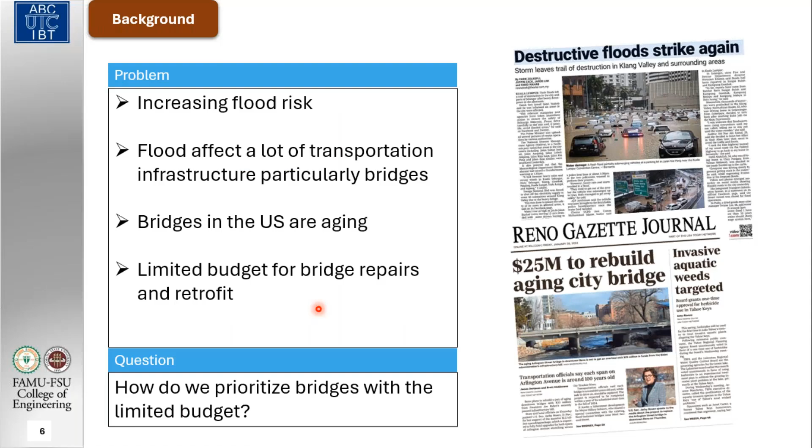Across the world, and even in the United States here, we are seeing increasing reports of destructive flood events. These floods are not just environmental issues, they directly impact transportation systems, especially bridges. To add to that, bridges in the United States are aging. This points to the fact that there's a need for maintaining bridges across the country. However, to construct or to repair a bridge is very expensive, and especially with a limited budget for bridge repair, this becomes a challenge. So the question we ask ourselves is, how do we prioritize bridges with the limited funds or budget we have?

So to do that, we did some literature review on this topic, and we were able to group it into four main themes. Each theme contributes important insights, but also reveals a key gap that motivates this research. The first theme we focus on is bridge structural health assessments. Studies such as Ntotsios et al. have explored advanced methods for detecting bridge damages.

Other research in this theme also talks about the nonlinear bridge health index. For instance, Jiang and Rens' research, as well as Inkoom et al., examine how both linear and nonlinear approaches of computing bridge health index affect the sufficiency rating used by the Federal Highway Administration. However, these studies primarily focus on the physical condition of the bridges, with limited consideration of how the conditions affect the broader transportation network.

The second theme we examined was the impact of infrastructure on accessibility and interdependencies. Pioneer researchers like Rinaldi et al. introduced the concept of cascading failure in interconnected systems. Similarly, Sharma et al. also provided a unified framework for modeling infrastructure interdependencies. Also, Mostafavi provided an extended resilience framework, incorporating stakeholder decision-making and resource allocation. Despite these contributions, most of the work remained conceptual with limited integration of detailed asset-level bridge conditions.

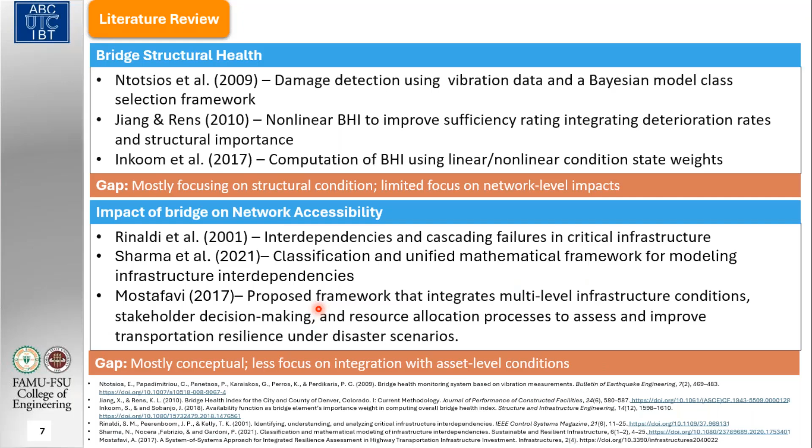The third theme we considered was the socioeconomic impact of bridges. Studies such as Donovan and Brooks highlight the role of bridges in supporting rural economies. Gandy et al. also showed that disadvantaged communities are disproportionately affected by bridge deterioration. Martens also emphasized that accessibility rather than mobility should be the central aim in transportation planning. This research also had a limitation in linking the bridge conditions and disruptions to population-level impact and accessibility outcomes. Finally, the last theme we considered was bridge prioritization.

Recent research from Sobanjo and Thompson emphasized the importance of incorporating risks and vulnerability into the prioritization framework. Earlier work by Gokey also integrates structural economics and policy consideration. Whilst this research was really good, and we also adopted some in our research, most of them were engineering focused with limited incorporation of spatial accessibility and how it affects the society.

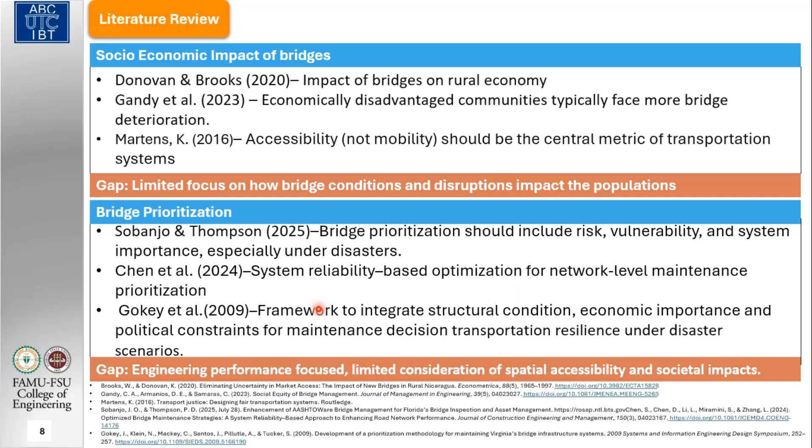Overall, the literature shows a strong advancement in individual areas. However, there's a clear gap in integrating these dimensions into a unified data-driven framework. So this led to our research aim, which was to develop a comprehensive data-driven bridge prioritization framework that supports optimal decision-making under constrained funding conditions.

Duval County was selected as a study area because it provides an ideal environment to demonstrate the scalability of this proposed framework. Duval County includes a mix of urban, suburban, and rural areas. Duval County also has a large complex transportation network and a diverse population distribution, meaning the model, when tested here, will provide a realistic and heterogeneous condition to scale it to other parts of the state.

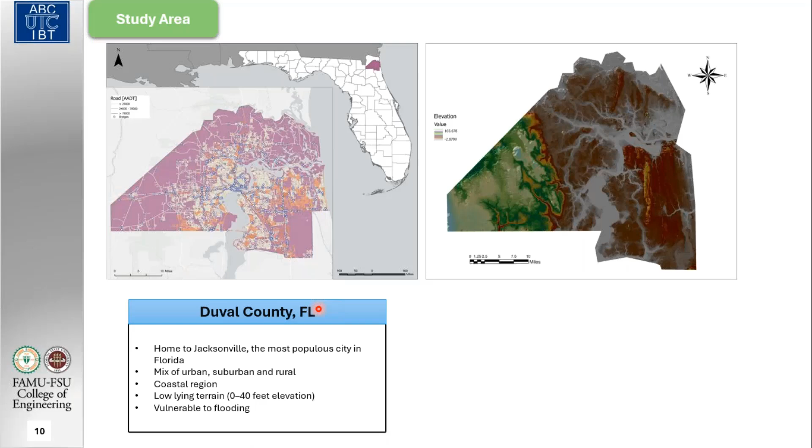Because of this combination, the framework was developed here so that it can be extended to other parts of the state. Duval County is also a coastal region which is exposed to flooding. So this makes it a very highly relevant case for our resilience analysis. So here we get to the methodology section of our research.

At the core of this research is a composite prioritization model which integrates multiple dimensions of bridge performance in a single decision making. So our model is to provide a composite prioritization model for decision making on how to prioritize bridges as a transportation infrastructure. So rather than relying on a single metric like condition rating, the model combines 4 key components that collectively define how critical a bridge is.

First, we consider the structural condition, which represents the physical state of a bridge. Second, we also incorporate the bridge fragility, which represents the probability of failure under flood scenarios. Third, we evaluate accessibility impact, which measures how the failure of a bridge affects travel time to critical services. And finally, we include economic impact, which accounts for the cost implications of repair, replacement, and delayed interventions.

These 4 components are integrated into a unified framework to capture structural vulnerability, hazard exposure, functional impact, and economic consequence in a single model. In the following sections, I'll walk you through each of the components and how they are quantified and incorporated in the prioritization process.

For the structural assessment, which is the first component we are going to consider, we use data from the National Bridge Inventory, which provides standardized condition ratings for bridges across the United States. From the data set, we extract key components from the bridge, such as the structure ID, deck condition, the superstructure condition, the substructure condition, and also the culvert condition.

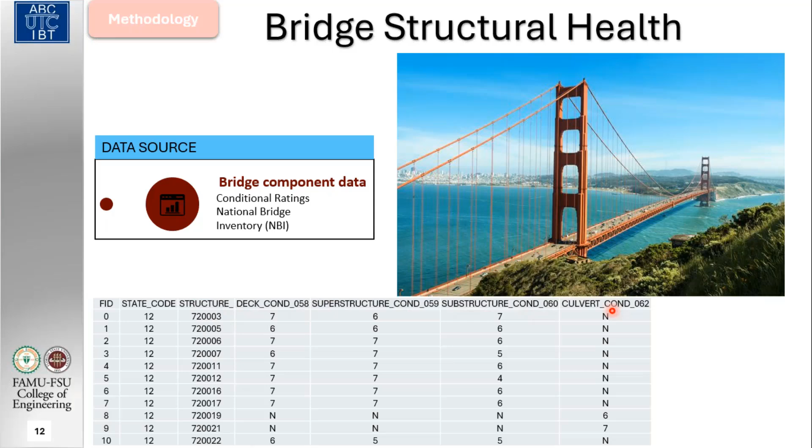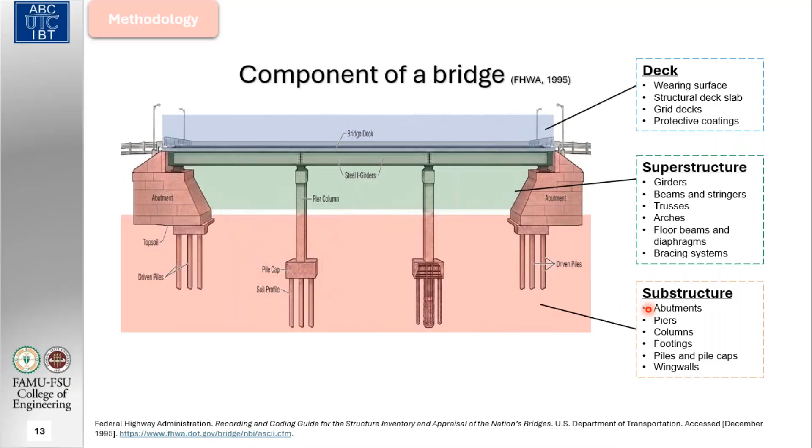From the Federal Highway Administration, the bridges are classified into 3 components. The first component is the deck component. Here, the deck carries the traffic loads and represents the user interface of the bridge. Below the deck is the superstructure. The superstructure includes elements such as the girders and the beams that support the deck and transfer load downwards. The substructure consists of the piers, the abutments, and foundation, which transfer loads from the bridge to the ground.

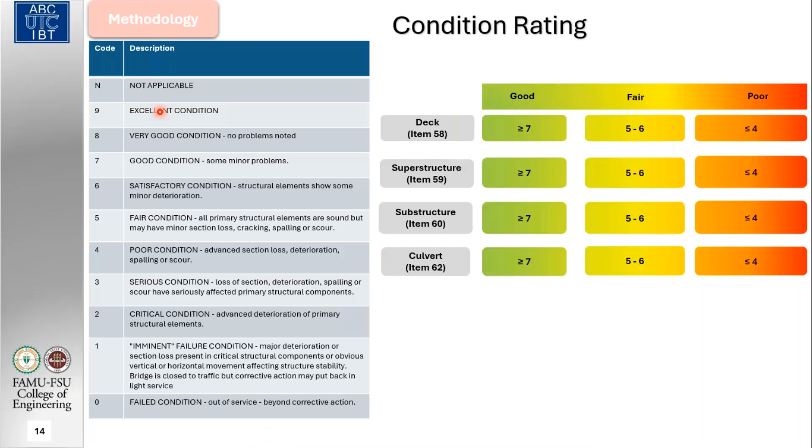To quantify the structural condition, the National Bridge Inventory uses a condition rating from 0 to 9, 0 being that the bridge is in a failed condition, and 9 means the bridge is in an excellent condition. This classification simplifies the interpretation and allows us to consistently identify bridges that may require maintenance, rehabilitation, and prioritization. However, the ratings the National Bridge Inventory provides are ordinal and may not be directly suitable for the quantitative analysis we do.

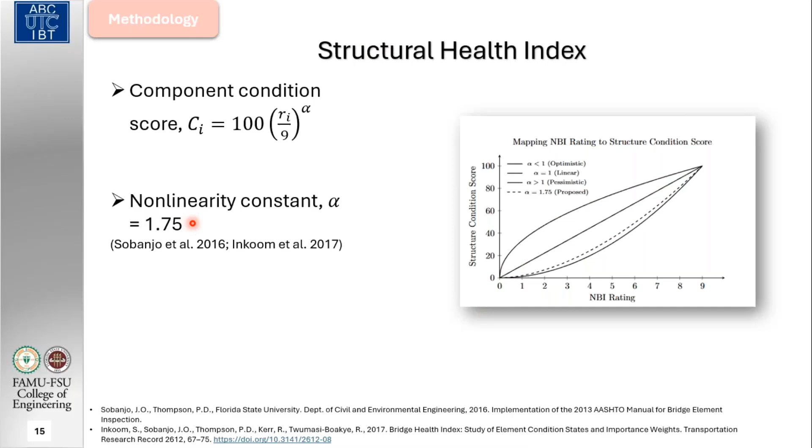This is an important component in the prioritization framework because it estimates the bridge fragility, which quantifies the probability of failure under flood conditions. This is particularly critical because not all bridges are equally exposed to flood risk. Bridges that are located within waterways are directly subjected to hydraulic forces such as drag, lift, and scour, making the bridges significantly vulnerable. In contrast, grade separated bridges are typically elevated above flood levels, and so they experience minimal hydraulic interactions.

So by modeling this fragility, we are able to distinguish between these types of bridges and identify those that are truly at risk due to flooding, thereby ensuring that we are prioritizing bridges that are most vulnerable to the hazard of focus. So here we use data from the NBI and Hazus for the bridge classification. We also got flood return period from the FEMA map. And we also got bridge geometry data from LiDAR and NBI as well. And finally, we also got discharge data from the US Geological Survey.

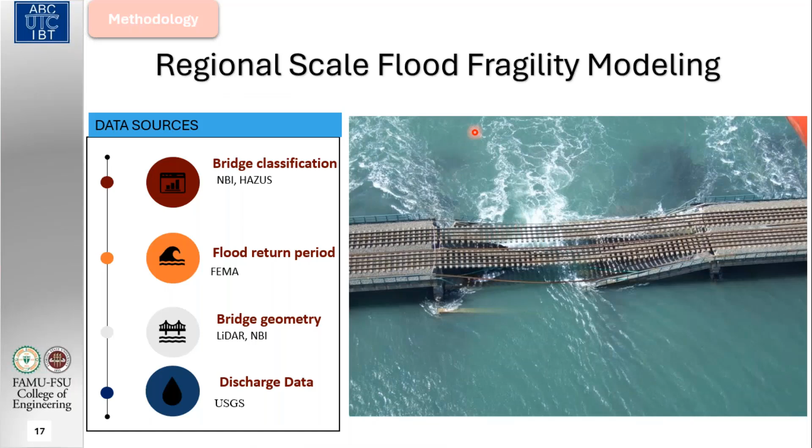So for our fragility framework, we first did bridge classification based on the structural and geometric characteristics. These steps allow us to assign necessary parameters for modeling of the flood. Next, we went to flood modeling. This is where we perform modeling to estimate the hydraulic demands at each bridge, including the flow, the depth, and the velocity. Third, we did a reliability analysis at the component level, evaluating how the bridge deck, the pier, and the foundation respond to the applied load using defined limit state functions. And finally, we use a probabilistic simulation to estimate the probability of failure for each bridge, accounting for the uncertainty in both loading and resistance.

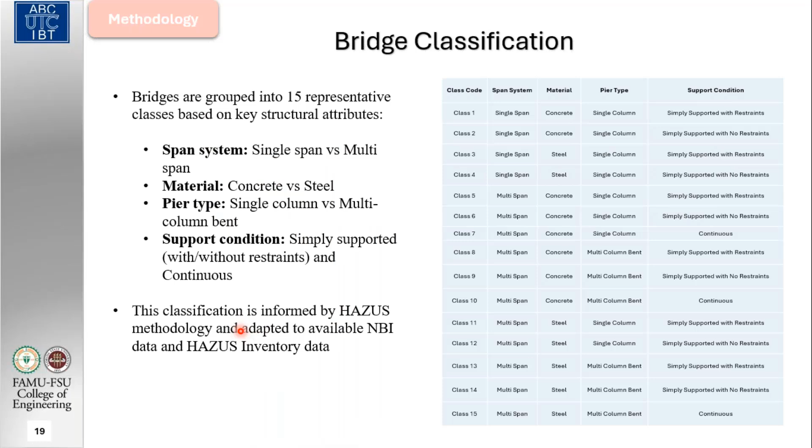First, we're going to talk about the bridge classification. Here, we group the bridges into 15 representative classes based on their key structural attributes. We focus on the span system, the type of material, the pier type, and then the support conditions. Specifically, we wanted to find out whether the bridge is a single span or a multi-span. We also wanted to find out whether the material used was concrete or steel. We also wanted to find out whether the pier type was a single column or a multi-column bent. And finally, we also wanted to see if the support condition was a simple support or a continuous support. All this classification was informed by the Hazus methodology, which was adapted to our available NBI data.

So after doing the classification, we went ahead with the flood modeling step, which involved the estimation of the hydraulic conditions at each of the bridge locations. Here, flood depth was obtained from the FEMA map based on a 100-year return period. The 100-year return period corresponds to a flood with a 1% annual probability of occurrence. This also provides a consistent benchmark for evaluating bridge vulnerability. So when we get the flood depth here, we want to get the flow velocity, because in our flood modeling, we are looking for two intensity measures, which are the flood depth and the flood velocity. So when we get the flood depth from the FEMA map, we also move ahead to get the flood velocity.

So for a bridge deck to fail, either of two failure events has to happen: either there is a transverse failure or an uplift failure. For an uplift failure to occur, the uplift force of the river acting on the deck should be greater than the self-weight of the bridge. And at the same time, the drag force acting on the bridge deck should be greater than the resistance given by the bridge. When these two events occur simultaneously, that's where we experience an uplift of the bridge deck. Similarly, for a transverse failure to occur, these two events also have to occur simultaneously. First, the drag force acting on the bridge should exceed the frictional resistance of the bridge deck. And at the same time, the uplift force acting on the bridge deck should be less than or equal to the self-weight.

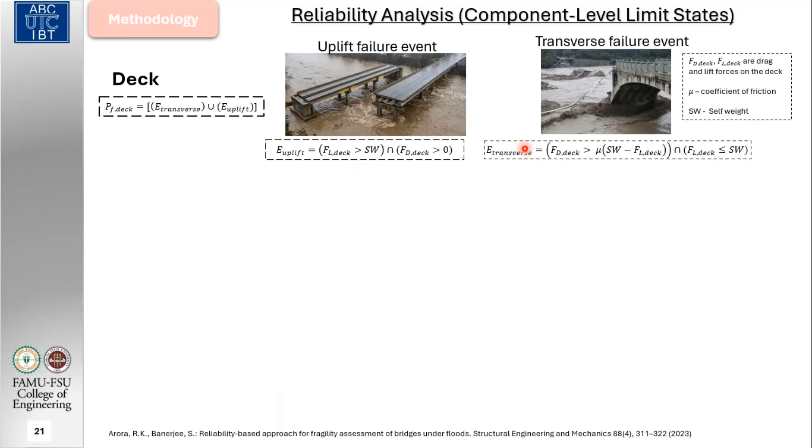The second component we are going to consider here is the pier failure. For a pier failure to occur, the longitudinal moment and the transverse moment acting on the pier should be greater than the capacity of the pier. When this event happens, it may cause the bridge pier to crumble and then fail, which may bring down the whole bridge. Finally, the last failure of the bridge we are going to talk about is the foundation failure.

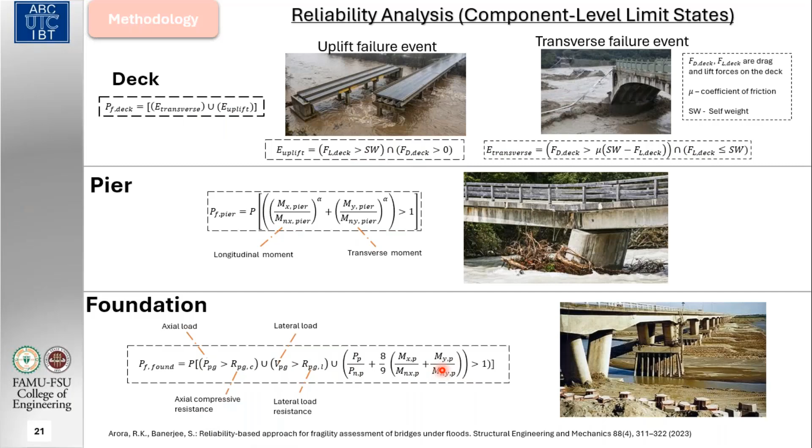So for the foundation to fail, any of these three failure events has to occur. The first event is when the vertical load of the bridge is greater than the vertical compressive resistance of the soil. When the lateral load of the bridge is greater than the lateral load resistance of the soil. When the combined effect of the axial load and the bending moment exceeds the structural capacity of the foundation, that's when the foundation of the bridge is considered to have failed. These failures are explicitly modeled in our limit state equations and in our probabilistic simulation in order to get the results.

So the slide here represents the resulting bridge fragility estimate, showing the probability of failure across the network modeled for the various scenarios of the bridges. The figure here shows the spatial distribution of bridge failure across the study area. And this figure shows the fragility surface that illustrates the probability of failure, which increases with increasing water depth and increasing velocity.

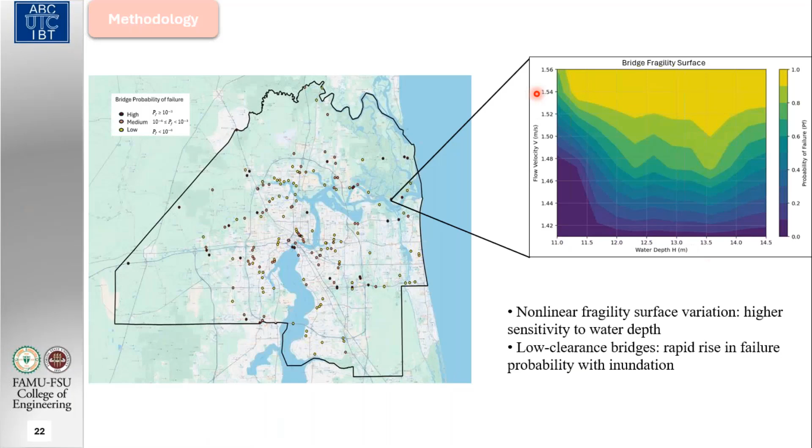The third component of the composite prioritization model is the accessibility impact of the bridges. Accessibility in this context refers to how easily people can reach essential services through the road network. We model using a network-based approach where census tracts represent the demand and services represent destinations. Beyond accessibility, we are also interested in understanding how important the bridge is. This concept within a network we call the degree of centrality.

In simple terms, degree of centrality measures how connected a node is within a network. For our bridge scenario, this reflects how many roads are connected to the bridge. A bridge with a higher centrality acts as a critical connector, meaning more paths in the network are connected to the bridge. This makes the bridge very relevant to the network. For this work, we collected demographic data at the census tract level. We also collected service coverage data considering the hospitals, fire stations, police stations, and grocery stores. And we also used the transportation network from OpenStreetMap.

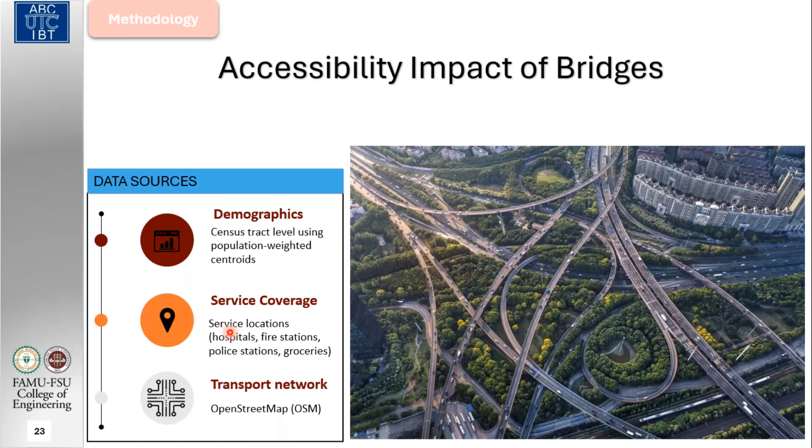So for the accessibility framework, we begin with the origins. Here we selected origins from the census tract, which represent the population weighted centroids. These capture where people are located in the county. We define destinations, which are essential services such as the hospitals, the fire stations, the police stations, and the groceries. These services are most needed in times of emergency. Then, using the transportation network, we compute a baseline where travel time from each origin to the nearest services is computed using the shortest path approach.

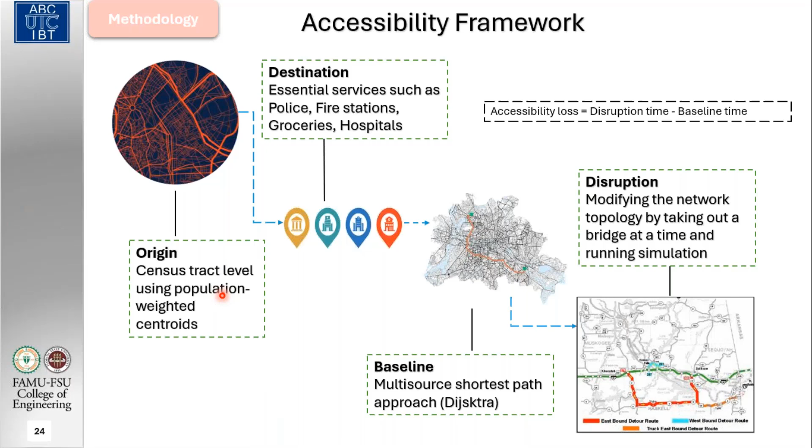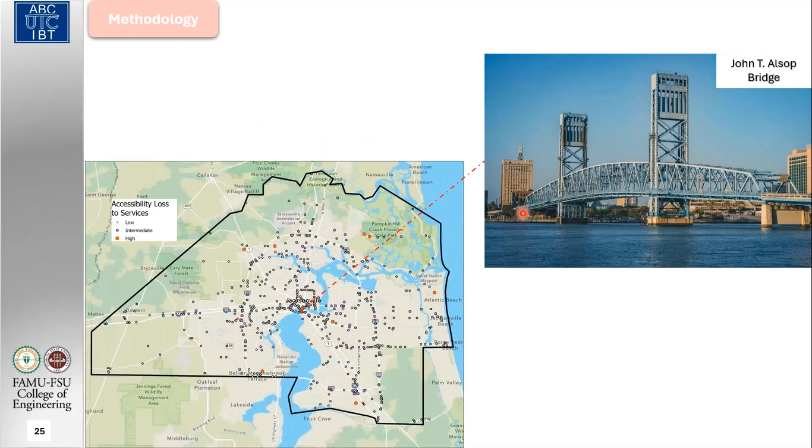We create a disruption scenario. To simulate the disruption, we remove one bridge at a time from the network and recompute the travel time. With that, we get an accessibility loss, which is the difference between the disruption time and the baseline time. We're able to create an accessibility impact, which helps us find which of these bridges are very important to the network. As you can see here, the figure shows the distribution of bridges in Duval County that have high importance to the network. And one of these bridges is the John T. Alsop Bridge.

Each map here shows the accessibility loss variation depending on the type of service. So, for instance, the grocery stores show accessibility loss especially in the peripheral regions of the county. For hospitals, the accessibility loss appears to be also somewhat central in the county. And for fire stations and police stations, services show different spatial sensitivity depending on the network and the location of the services.

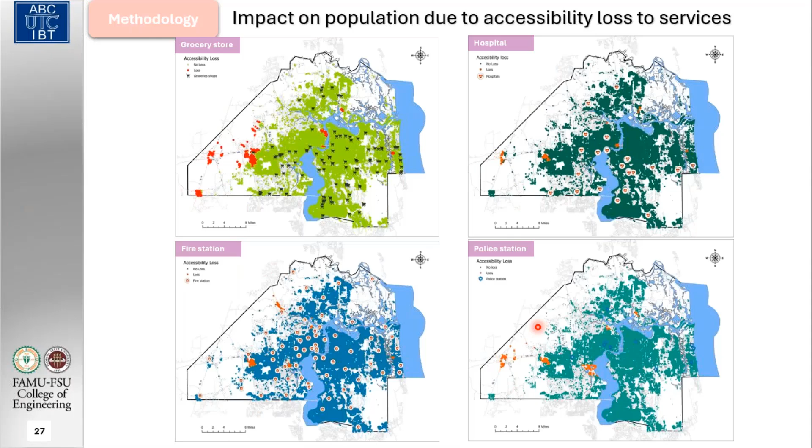This is mainly due to the lack of alternative routes in rural areas, which is consistent with what we learned from the literature: when a bridge breaks, it will mostly affect rural communities, and disadvantaged communities are impacted most when a bridge is broken.

So this brings us to our last component of the prioritization model. This economic analysis is built on three key data components derived from the National Bridge Inventory. We use a 20-year inspection record from 2005 to 2025, which provides longitudinal data on bridge conditions over time. Second, we use the superstructure condition to construct a structural condition index. And third, we use traffic data, specifically the average daily truck traffic, which captures the loading effects that contribute to the structural deterioration of the bridges.

Also here, we frame the replacement cost as the construction cost plus the demolition cost. In other words, to replace a bridge, you have to demolish the bridge and reconstruct it. These figures are what we used to estimate the replacement cost. We use estimates from the Federal Highway Administration, where we got the unit cost of construction and unit cost of demolition, which we multiply by the area of the bridge deck to get the estimate for the bridge.

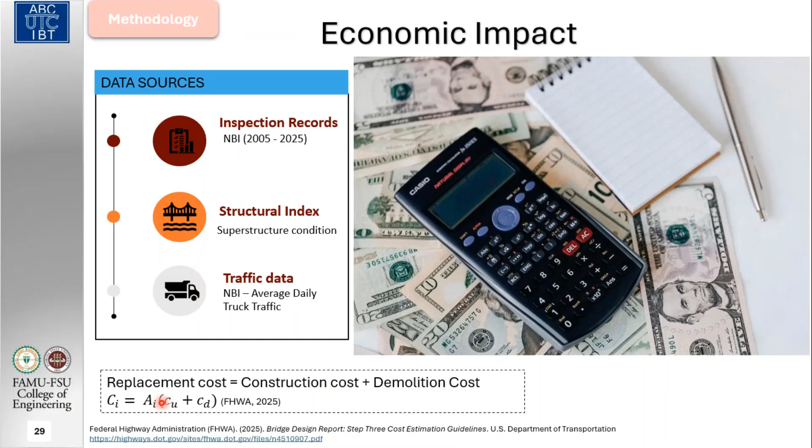So to begin our economic framework, we first computed the current superstructure condition of each bridge, derived from the NBI inspection data. From there, we evaluate whether the bridge has exceeded the threshold we gave it. Here we give a threshold of 25, which roughly corresponds to about 4 on the National Bridge Inventory condition rating, considered a poor state. If the threshold is exceeded, the bridge is considered to need immediate attention and moves into our immediate attention group.

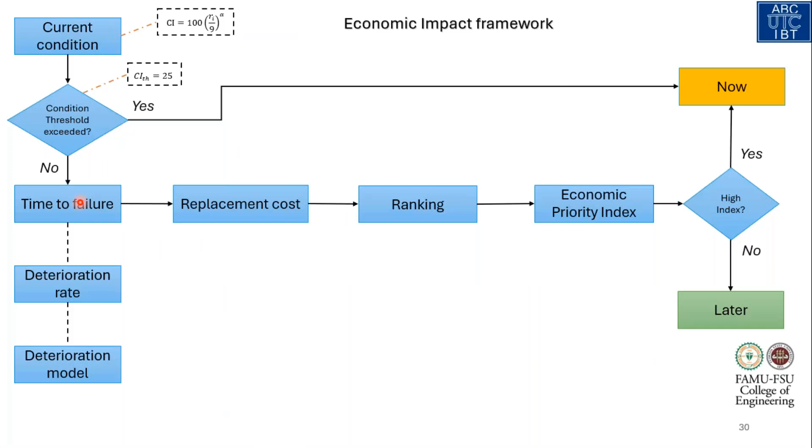However, if the bridge has not yet exceeded the threshold, we estimate the time to failure. In other words, how long is the bridge going to take to fail? This helps us make an informed decision on whether to work on the bridge now or later. To find the time to failure, we have to find the deterioration rate, and to find that, we needed to create a deterioration model.

Here we chose a panel regression for our deterioration model due to the evolution of bridge data over the 20-year period. From this model, we obtained an effective deterioration rate, which reflects the deterioration of the bridge over time. This deterioration rate is used to compute the time to failure, helping us estimate how long the bridge will take to deteriorate.

Next, we estimate the replacement cost based on the bridge characteristics. For this stage, if a bridge is replaced immediately, the present value of the cost is simply the current replacement cost. However, if the replacement is delayed, the cost changes over time due to two competing effects.

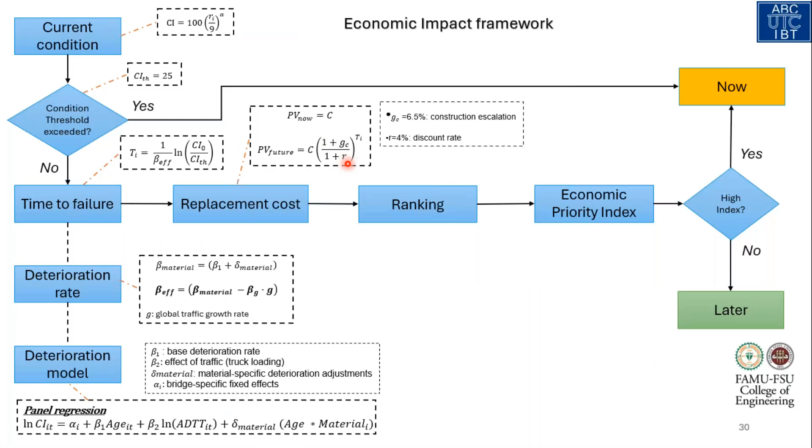The first effect is the construction escalation, and then the second effect is the discount rate. So from there, we do a ranking. During this ranking, we use the cost estimates to rank the bridges based on the economic impact of delaying replacement. So here, the bridge is ranked on two economic indicators, which are the absolute penalty and the relative efficiency of the bridge replacement.

Since we have these, we now do the ranking based on a multi-objective framework by first maximizing the absolute cost penalty, and then second, we try to minimize the ratio of immediate to future costs using the Pareto front. From this ranking, we're able to calculate the economic priority index.

The next question we ask is: is the index of the bridge high enough? If the index of the bridge is high enough, the bridge then goes into the immediate framework. And if it is quite low, then the bridge is deferred for some time. So this helps us to arrange the bridges in terms of their economic priority.

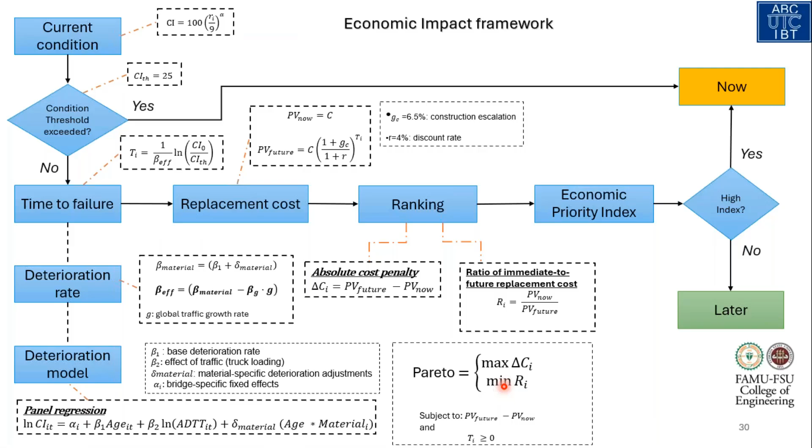So with that, we're able to come to a composite prioritization model. In the composite prioritization model, we fused all the indexes we generated from all four components. So by now, we have our bridge health index, and we also have our bridge fragility, or the probability of failure of each of the bridges.

We also have the accessibility impact index, which helps us to know the importance of the bridge at each location. And finally, we have our economic priority index, which helps us to choose a trade-off of whether to fix the bridge now or delay it until later. So here is the composite prioritization framework. It has three main steps.

The first step is the data integration, which we just talked about. Here we are able to fuse all the components into one. To do that, we have to standardize the variables because all four components were in different metrics. So to use the data, we have to standardize them into one common standard.

The next stage was feature engineering. This is where we use principal component analysis. The principal component analysis helped us to reduce the dimensionality, and from there to uncover the dominant pattern of the relationship among the multiple competing bridge prioritization indicators.

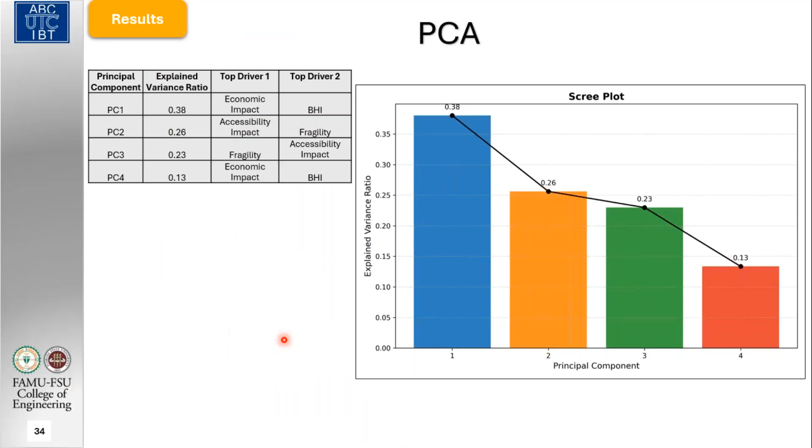This table interprets what each principal component represents. For principal component one, the top driver was the economic impact, followed by the bridge health index. For principal component two, the top drivers are the accessibility impact and the fragility impact. Overall, the analysis tells us that the prioritization framework is not dominated by a single factor. Instead, it reflects a multidimensional structure where economic, structural, and accessibility considerations play a significant role.

Next, we did a Pareto analysis. After identifying the key dimensions of the system using principal component analysis, we applied a Pareto-based multi-objective optimization to identify bridges that represent the most critical trade-offs across the competing objectives.

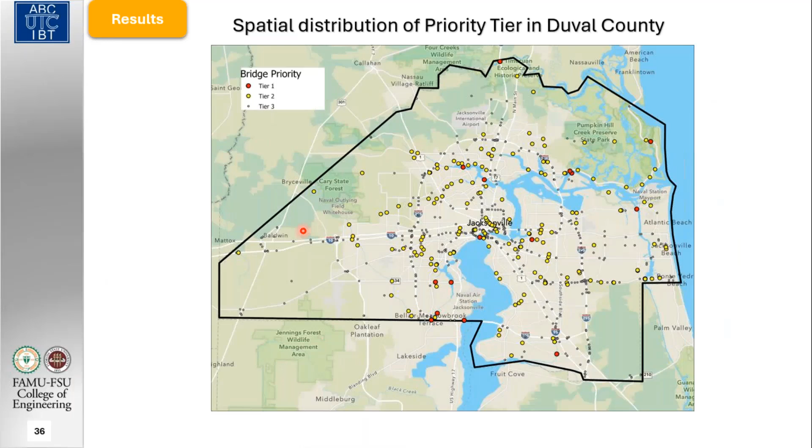So for discussion, we learned that bridge priority is driven by multiple interacting factors, not just structural condition. Also, from our research, we show that some bridges may be moderate, but at the same time can be critical due to the risk they face, the accessibility impact, how important the bridge is to the network, and how economically critical the bridges are. So some bridges are very economically expensive to delay maintenance or replacement. And finally, this research also provides a framework that enables data-driven, system-level prioritization for resilient decision-making.

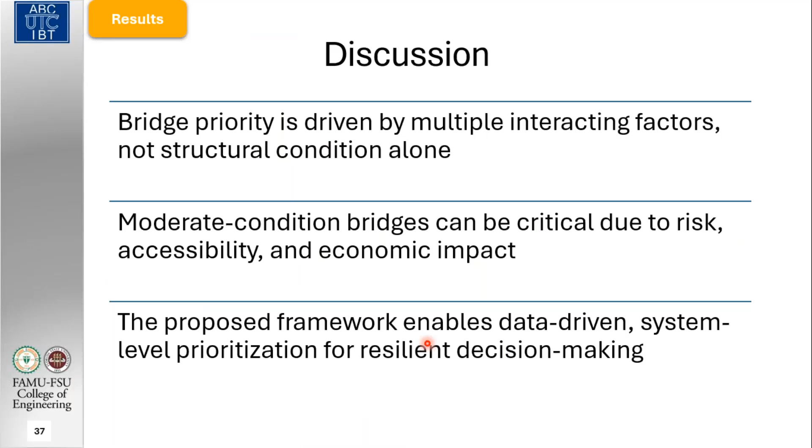And so from here, Dr. Sharma continues with the IntelliVis web-based GIS dashboard that we are developing, a continuation of this project. Thank you, Eric. So Eric so far covered all the conceptual and theoretical contributions that we made in developing this framework, but we have been constantly reminded by the UTC leadership that one of the main priorities of this transportation center is that we need to have impact in the practical application and use of the research developed by the center. So in that regard, what we have also been working on for the past year is an online web-based dashboard that houses all of the work that we've been doing, and we'll try to share this publicly so people can use the research that we have done.

And in this regard, we have made a lot of progress. So this platform has several components. We have a web-based GIS dashboard. We also have a spatial database that includes all of the data sets that we have used. And then we also have the rendering system that can help you look at the findings from our analysis, as well as do your own analysis for any scenario-based things that you would like to do with the data we have.

So for the user workflow, there are two types of user workflows that we are expecting in the system, or trying to implement. One is that the user can look at a layer of data and just browse the information we have, or look at the results of our analysis, for example, this one for prioritizing bridges, or they can click on one of the analysis tabs, run these analyses, and generate reports they can use for their research or for other purposes.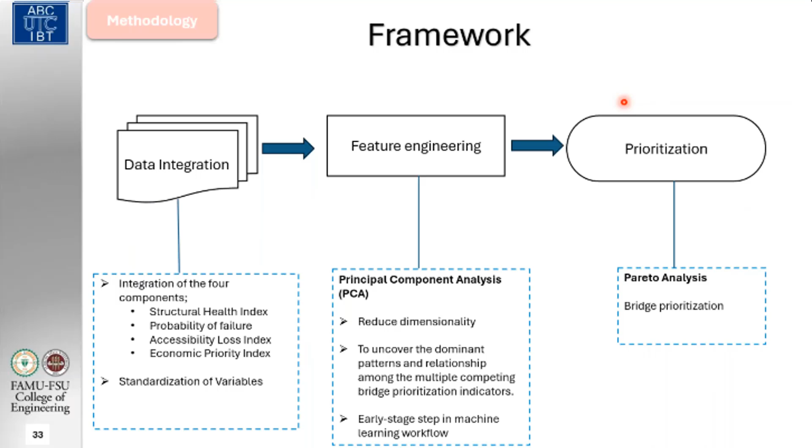Okay. Slide 33: could you elaborate on how the four components were integrated in your framework, particularly the observed NBI condition ratings and how they were integrated with the simulated condition deterioration models? Right. The PCA part of the analysis is just to check that the information provided by the four criteria is unique, or whether components could be removed. We found that almost all of them cover unique information. Even the fourth component covered more than 10% of the overall variance, which tells us the four things we listed cannot be reduced to three. That was the purpose of the PCA.

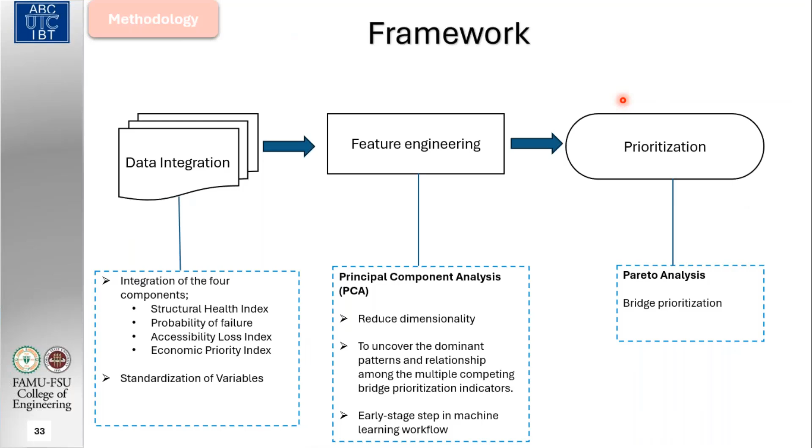When it comes to integration, we don't really integrate any of them together. As Eric presented in the final slide, prioritization is based on Pareto analysis, which solutions are non-dominated. So the bridge selected as a priority needs to be non-dominated in all of these categories. We don't use the PCA results directly to prioritize. The PCA result is a check to see whether we could reduce the dimensionality of our priority scheme.

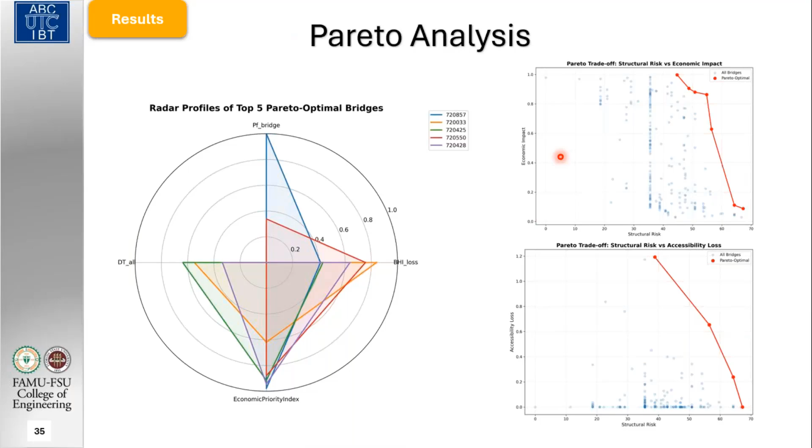All right, and we're getting close, so this should be the final question. From your work, I see that you just picked Duval County. If you were to scale this up to, let's say, all the counties in Florida, just discuss real quick what the challenges would be with that. One of the major challenges would be the availability of the input hydraulic models, because those are done at county level and they are very hard to obtain for the region in general.

And that's something that we can try to work on with other collaborators, and if we can do those in-house, that would be useful. The other thing would be looking at the inventory data and trying to figure out if we can get the best quality data for the inventory itself, because we had to do a lot of LiDAR based analysis at our end to figure out the exact elevations of different components, so that we could be sure about what is the flood depth and velocity that we would see at a site.

These are a few, but the next would be just the computational cost. To replicate this for the whole state would be a big challenge when it comes to the amount of analysis. Well, thank you for those responses.

So, Tord, I turn it back to you. Thanks for a very great presentation. To the researchers at FAMU, when this tool is available, maybe we can share it on our website. Like you said, it's going to be a web-based tool that can be used by others. Maybe we can also provide the instructions on how they can collect the data for their states, the area where they are interested to understand the potential damages to the bridges, or finding out which bridges are more important. So very, very interesting presentation.